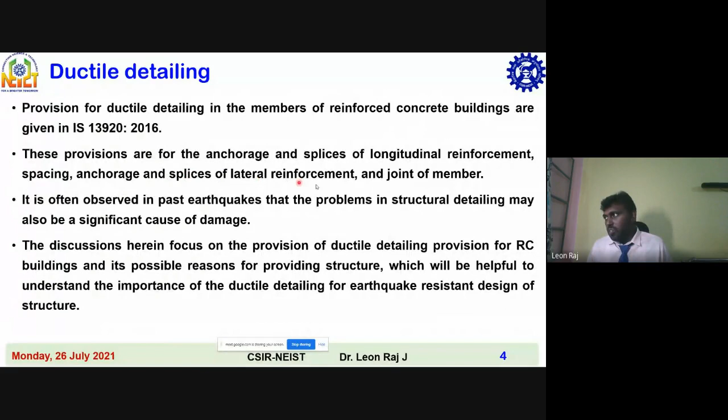Introduction to ductile detailing provisions. The ductile detailing provision is given in IS 13920 for members of reinforced concrete buildings such as beams, columns, and shear walls, members subjected to earthquake and gravity loading. These provisions cover anchorage and splices of longitudinal reinforcement, spacing, anchorage and splices of lateral reinforcement, and joints of the member. It is often observed in past earthquakes that problems in structural detailing may also be a significant cause of damage.

The discussions here focus on the provision of ductile detailing for RC buildings and its possible reasons, which will be helpful to understand the importance of ductile detailing in earthquake resistant design of structures.

General specification: the design and construction of reinforced concrete buildings shall be governed by the provisions of IS 456/2000, except as modified by the provisions in this code. So we will always follow IS 456/2000, with some additional modifications given in IS 13920 to ensure ductile failure in buildings. To ensure ductile failure in buildings, we have to ensure ductile failure at the member level itself, and that is assured by materials also.

Therefore, the minimum grade of concrete is fixed by IS 13920 for buildings and other structures. For buildings, M25 is the minimum grade of concrete for buildings more than 15 meters in height in seismic zones 3, 4, and 5, and not less than that required by IS 456 based on exposure conditions. There are several types of exposure conditions: moderate, severe, very severe. So based on the exposure conditions, we also have to consider the minimum grade of concrete for the buildings.

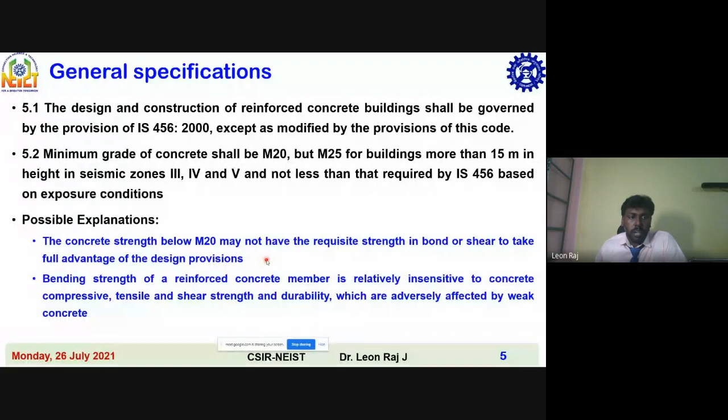Possible explanations: the concrete strength below M20 may not have the requisite strength in bond or shear to take full advantage of the design provisions. The bending strength of the reinforced concrete member is relatively insensitive to concrete compressive, tensile, and shear strength and durability, which are adversely affected by the weak concrete, and material characteristics and irregularities.

So there are four stages, right? There are different terminologies: characteristic strength, concrete acceptance criteria, target mean strength. For example, if you have an M20 grade of concrete, your target mean strength is 26 MPa, that is FCK plus 1.65 into established standard deviation of 4 MPa.

So therefore your target strength is 26 MPa. But in the field, it is not possible to achieve the target mean strength. So what is the code specified acceptance criteria? Actually, this table gives the acceptance criteria of concrete, based on Table 11.

For M15 and above, the acceptance criteria is FCK plus 0.825 into established standard deviation. For 20 MPa concrete, your acceptance criteria is 23.5 MPa, or FCK plus 3. We can take that as FCK plus 3, that is 23 MPa; FCK plus 0.825 into standard deviation 4 will be around 23.5 MPa. So you will get 23.5 MPa as the acceptance criteria.

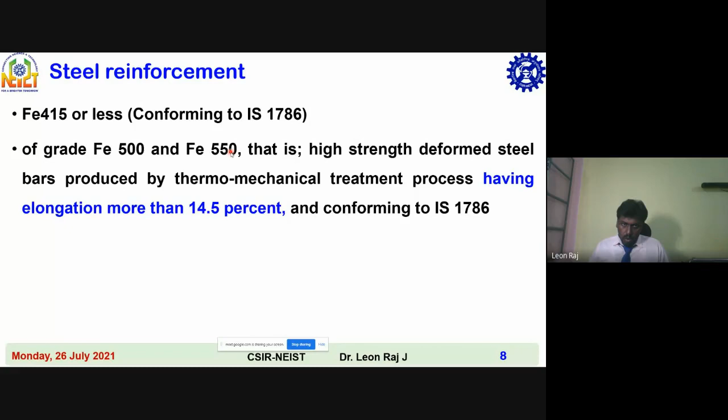So proof stress - I want to give more clear information about the proof stress. The proof stress is measured by drawing a line parallel to the elastic portion at a specified strain. So this is the specified strain.

This strain being a percentage of original gauge length, hence it is 0.2% proof and 1% proof. These are all there. So I want to give an example.

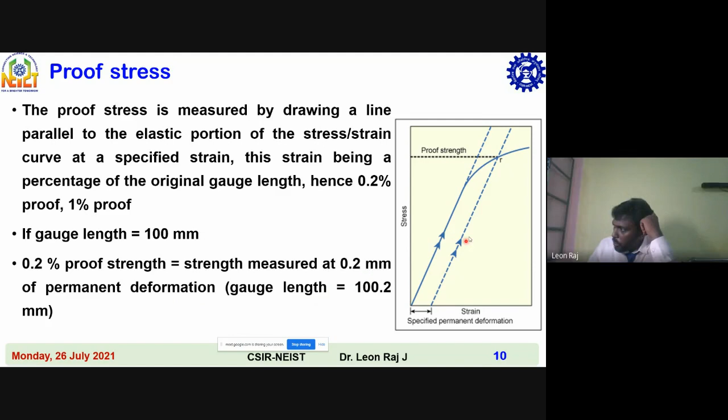If gauge length is 100 mm, so if you are testing a specimen and our gauge length is 100 mm, then 0.2% of proof strength is equal to strength measured at 0.2 mm of permanent deformation. Your gauge length at that point shall be 100.2 mm. So that point is exactly what you get. From this point, if you draw this same slope, you will get this proof strength.

Then the ratio of actual ultimate strength by 0.2% of proof strength is equal to 1.125.

In RC frame buildings, lintel beams are not to be integrated into the columns to avoid the short column effect. So when you are doing analysis, you should not consider these lintel beams. If you are considering them, that has to be incorporated in the structural analysis. When integrated, they shall be included in the analytical model for structural analysis.

Plinth beams and staircase beams and slabs framing into columns shall be included in the analytical model for structural analysis. So this is the plinth beam and this is the column. When you consider this plinth beam for analysis, to avoid the short column effect, you have to consider the same plinth beam in the structural analysis model also.

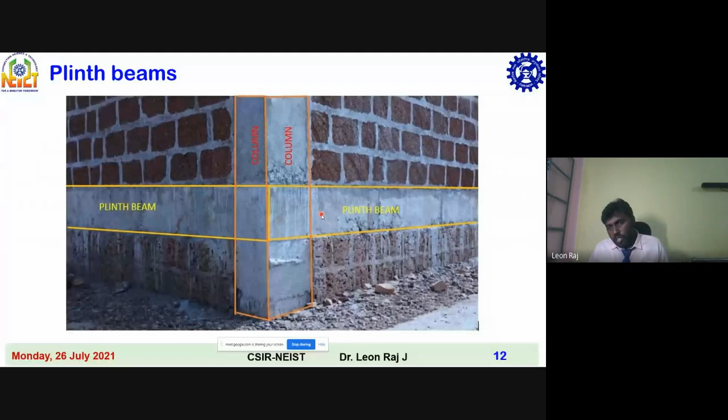Then general specifications: RC regular moment resisting frame buildings shall have planar oriented along the two principal plan directions of buildings. Irregularities listed in IS 1893 shall be avoided. What are all the irregularities? Mass irregularity, stiffness irregularity, vertical discontinuity irregularity, and many more irregularities that we are going to see in the next slides. Buildings with any of the listed irregularities perform poorly during earthquake shaking.

In addition, buildings with floating columns - what is meant by floating column? Usually a column starts from the foundation, right? A floating column starts from the beams. So beneath the floating column, you have to construct a deep beam. So setback columns or these floating columns perform poorly during earthquakes.

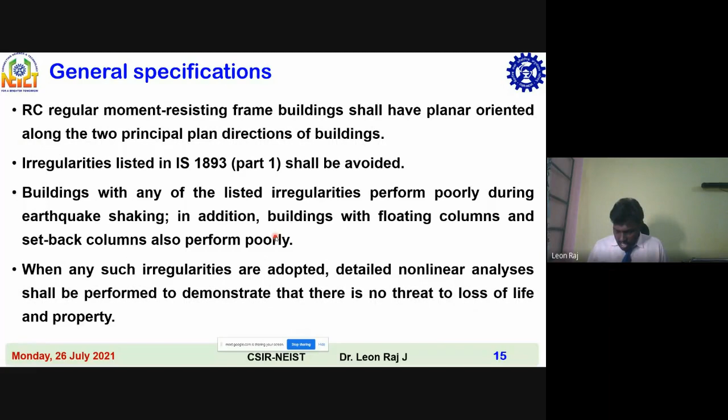Then seismic zoning maps. The BIS sectional committee has appreciated that there cannot be an entirely scientific basis for zoning in view of the scanty, poor data available. So there are different zones classified as 1, 2, 3, 4, and 5.

Most of the northeast states belong to zone 5, and Tamil Nadu belongs to zone 2 or 3 - mostly zone 2. Gujarat and the places near the Western Ghats come under zone 3 and 4. Maximum intensity at different places can be fixed on a scale only on the basis of observations made and recorded after the earthquake.

Thus a zoning map based on the maximum intensities arrived likely leads in some cases to incorrect solutions, in view of incorrectness in the assessment of intensities. Still, a lot of research is going on in measuring the intensities of earthquakes, human error in judgment during damage surveys, and variations in quality and design of structures causing variation in type and extent of damage to structures with the same intensity.

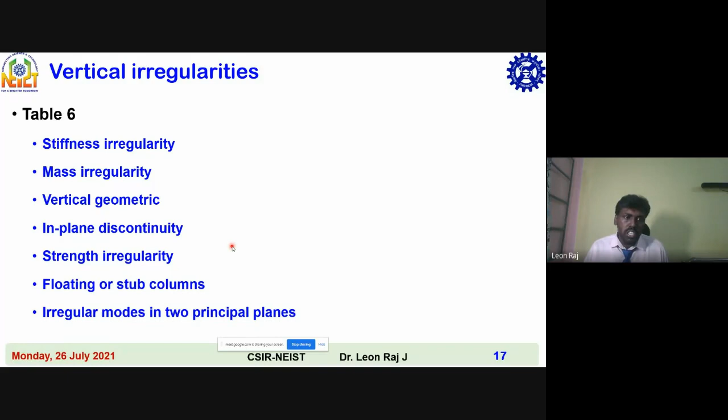There are different types of irregularity: stiffness irregularity, mass irregularity, vertical geometric irregularity, in-plane discontinuity, strength irregularity, floating or stub columns, and irregular modes in two principal planes.

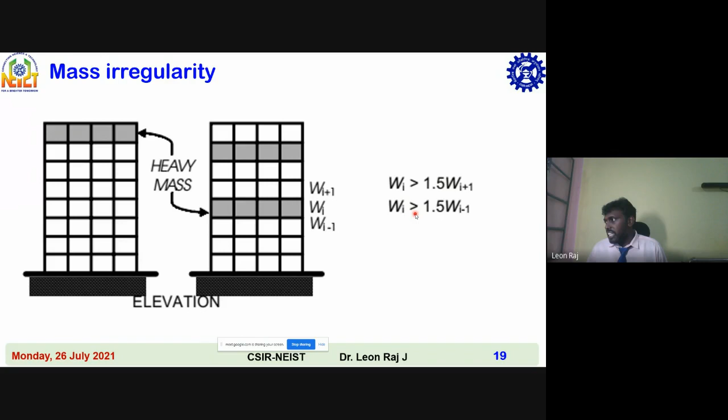If the stiffness of the lower story is Ki, the first story is Ki plus 1, second story is Ki plus 2, and if Ki plus 1 is greater than Ki plus 2, or Ki plus 1 is greater than Ki, then it is called stiffness irregularity. For mass irregularity, if Wi is greater than 1.5 times Wi plus 1, or Wi is greater than 1.5 times Wi minus 1, then it is called mass irregularity.

For vertical geometric irregularities, if the base length of the building is L, and the irregular portion is A, then A greater than 0.25 L indicates irregularity. If irregularities exist on both left and right sides, A should be greater than 0.125 times the base of the building.

Here you can find different types of irregular buildings. This kind of building is available in Chennai also. Whenever you go towards Tambaram, you can find an IT building that looks like this. Here the irregularity A should be greater than 0.1 times of L.

If the top portion is L1 and the bottom portion is L2, and L2 is greater than 1.25 times L1, then this is vertical geometric irregularity, expressed as L1 by L, with L1 and L2 as shown.

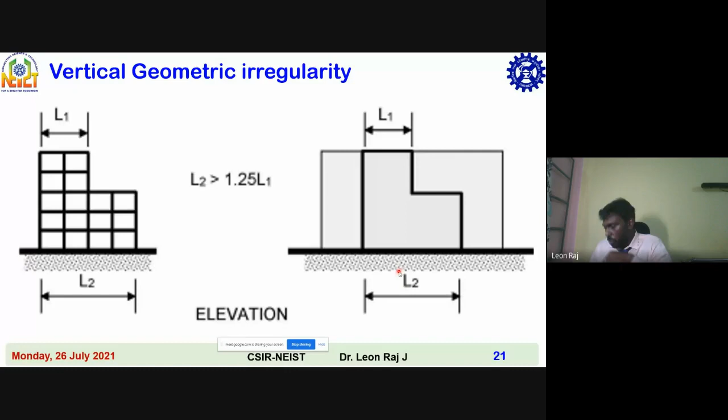In-plane discontinuity in vertical elements occurs in shear walls. This often happens when you need a parking space, or when the first floor starts from a certain end, causing vertical discontinuity in the shear wall. When LW, L0 is greater than 0.2 LW, that is in-plane discontinuity.

For strength irregularity, the lower story is SI, first floor is SI plus 1, second story is SI plus 2. If SI plus 1 is less than SI plus 2, and SI is less than SI plus 1, then this type of irregularity is known as strength irregularity.

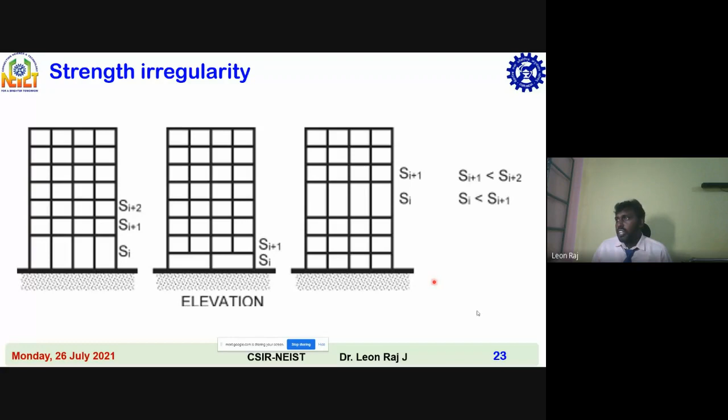Then detailing of beams and columns.

The requirements of this section shall apply to beams resisting earthquake induced effects in which the factored axial compressive stress does not exceed 0.08 FCK.

If your FCK is 20, 30, 50, 60, 80 MPa, that is M20, M30, M50, M60, M80, your factored axial compressive stress limit shall be 1.6 MPa, 2.4 MPa, 4 MPa, 4.8 MPa, 6.4 MPa respectively.

When it is less than this factored axial compressive stress, you can classify it as a beam. Beams in which the factored axial compressive stress exceeds 0.08 FCK shall be designed as columns, inclined members, or strut members.

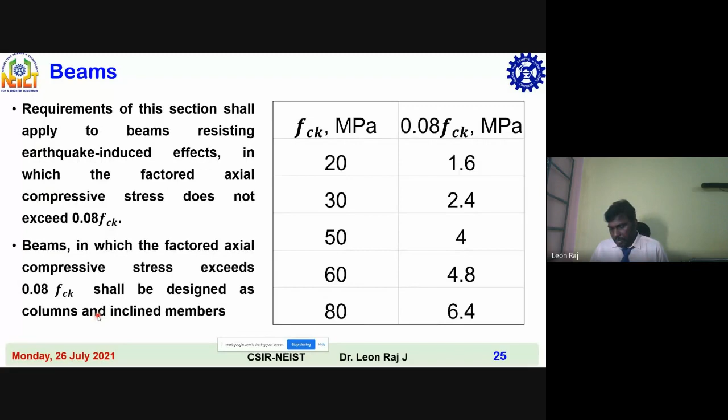The code specifies minimum requirements. If a practicing engineer is asked to check a design, the first thing you have to verify is certain criteria specified by the code.

According to IS 13920, the width to depth ratio of beams matters, with minimum width and maximum depth specified. The width to depth ratio should be greater than or equal to 0.3. So for a beam with depth D, width equals 0.3 times depth. If your width is 150 mm, your maximum depth is 500 mm.

To avoid slenderness, the code has specified this criteria: width 200 mm means maximum depth 665 mm, 250 mm means 833 mm, 300 mm means 1000 mm, approximately 3 times the width. 350 mm means 1167 mm, 400 mm means 1333 mm, 450 mm means 1500 mm, and width 500 mm means 1667 mm.

This is the maximum depth, so your selected width and depth should be within the limit. The minimum width is 200 mm, so the first line criterion is struck out. Whatever beams you provide should have a minimum width of 200 mm and maximum depth of 0.25 times clear span.

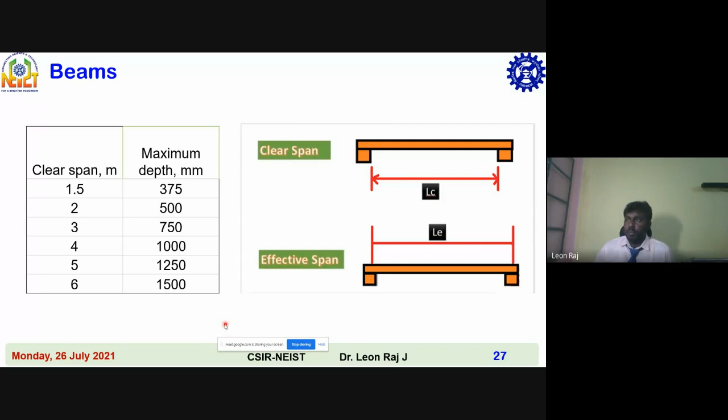So what is the maximum width of the beam? This figure may look confusing, but I want to decode this figure.

So here you can see the columns here. This is the column, and this column is tied with lateral ties. This is the lateral ties, and this is the closed tie. This is one closed tie, and this is also another closed tie.

So width of the lateral dimensions, C1 and C2, were the width of the lateral dimensions. Here you can see the transverse reinforcement. These are all transverse reinforcement through the column to confine the beam, with longitudinal reinforcement passing

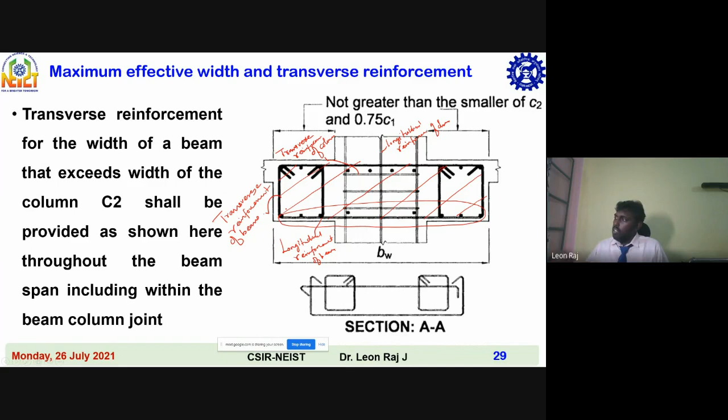So here you can see this is the longitudinal direction of the column, and this is the transverse direction of the column. And here this is the longitudinal direction of the beam, and this is the transverse direction of the beam.

Longitudinal reinforcement: the beam shall have at least two 12 mm diameter bars each at the top and bottom faces. The minimum steel reinforcement shall be 0.24 times square root of FCK divided by Fy.

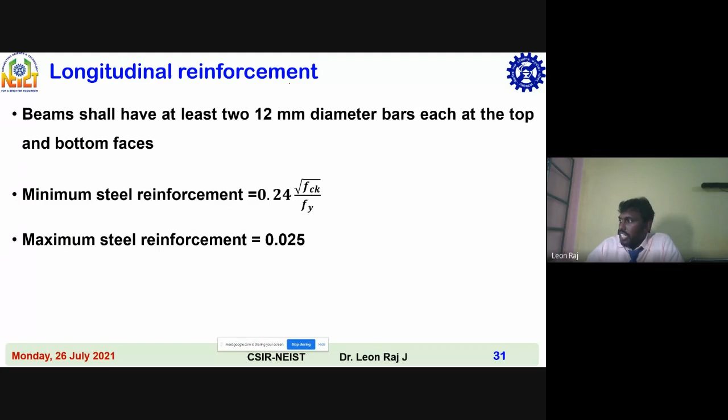So you know the grade. FCK is the grade of concrete. Fy is the yield strength of the steel reinforcement, that is grade of steel. The maximum steel reinforcement shall be 0.025.

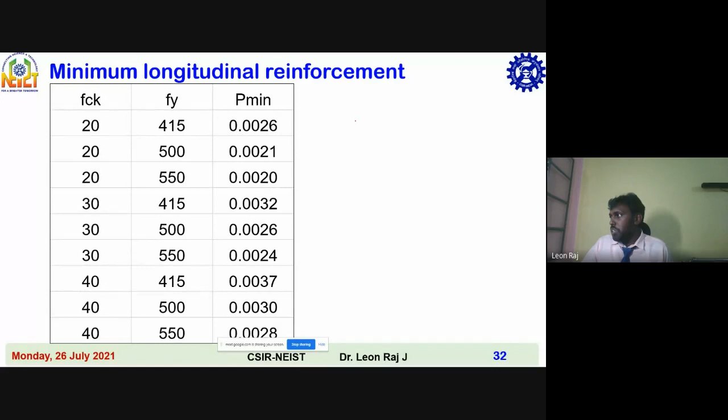How to calculate this percentage, I'm showing in the next slide. So if your grade of concrete is 20 and your Fy is varying between 415, 500 and 550 MPa, what is the minimum longitudinal reinforcement? If this is your beam, the reinforcement provided at the bottom is known as longitudinal reinforcement, and the minimum percentage of reinforcement increases accordingly.

So you can see the minimum percentage of reinforcement, that is P minimum, versus Fy. For Fy of 415, 500, and 550, the values are 0.0026, 0.0021, 0.0020 respectively. Here you can see it is decreasing. So these three values, if you notice, and here also these three values, it is decreasing.

So when the grade of concrete increases - this is M20, this is M30, and this is M40 - and the grade of steel is fixed, your minimum tension reinforcement increases. When the grade of concrete increases, your minimum tension reinforcement increases from 0.0026 to 0.0037. When the grade of steel increases, your minimum tension reinforcement requirement decreases. That's what I want to say with this statement.

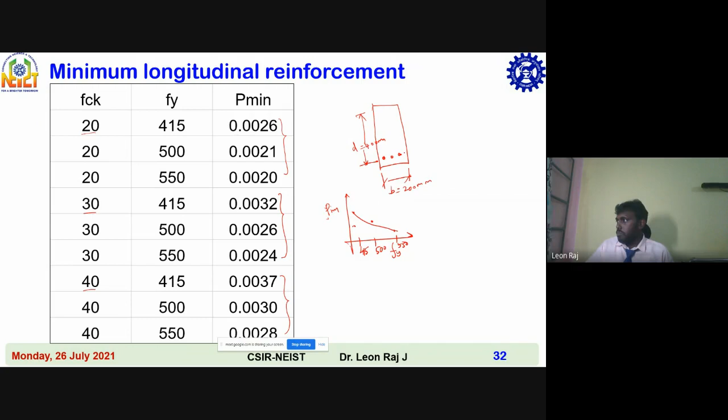Then if your breadth is 200 mm and your depth is 400 mm, provided with 4 bars of 12 mm diameter.

Your AST, your percentage of tension reinforcement, that is rho m - rho means reinforcement percentage, m means main reinforcement. So rho m is equal to AST, area of steel reinforcement in tension zone, divided by B into D, where T means tension zone, B is breadth and D is depth. Your AST is equal to pi by 4 into D square, which is equal to 452 mm square. The unit is mm square, and this is mm and mm, so it will be cancelled. And your percentage of reinforcement is...

0.0056. Sometimes it is mentioned in percentage also, that is 100 into AST divided by BD, but here we are mentioning it in terms of ratio only. Your maximum tension reinforcement ratio as per IS code is 0.025, and your minimum is 0.0026. So whether your provided reinforcement is within the limits or not, that you have to check. This is what you have to do every time for all the beams.

Then, longitudinal reinforcement of beams. Longitudinal steel on the bottom face of a beam framing into a column shall be at least half of the steel on its top face at the same section. So this is your column, and this is your beam.

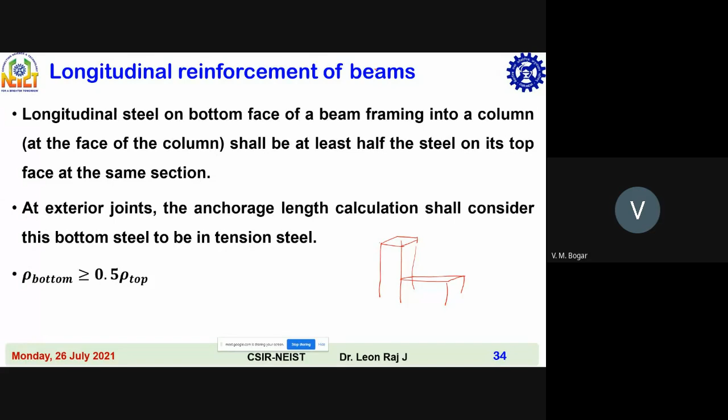The longitudinal steel on top - and the longitudinal steel on the bottom face of the beam. Here is the bottom face. So this is the bottom face. The longitudinal reinforcement provided at the bottom face of a beam framing into a column - so this is the place framing into the column - shall be at least half the steel of its top face, that is 50% of the top reinforcement at the same section. So the bottom reinforcement should be at least 50% of the top reinforcement. That's what this line is explaining.

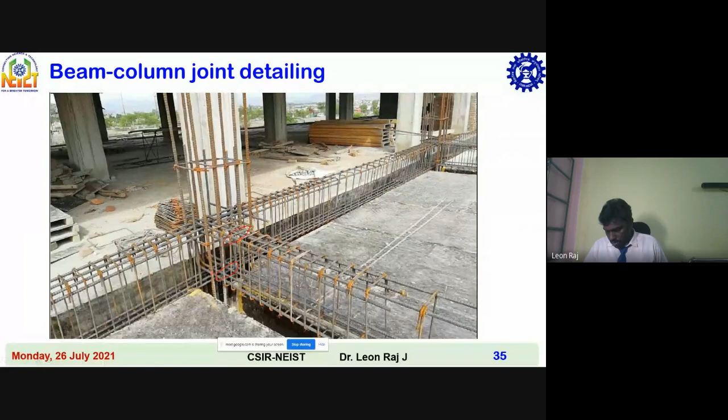At exterior joints, the anchorage length calculation shall consider this bottom steel reinforcement - that is rho bottom shall be a minimum of 0.5, that is 50% of top reinforcement. Here you can see these are the longitudinal reinforcements of columns, and this is the longitudinal reinforcement of beams. So the code is telling that the reinforcement framing into the column shall be at least 50% of the top reinforcement. So first you have to calculate the reinforcement percentage at the top and at the bottom, and check whether it is above the criteria or not, to ensure ductile behavior.

Then, longitudinal reinforcement of beams. The longitudinal steel in beams at any section, at top or bottom face - so this is the top face or this is the bottom face - shall be at least 0.25 times the longitudinal steel provided at the top face of the beam at the face of the column. When the top longitudinal steel in the beams at the two supporting column faces is different, the larger of the two shall be considered.

Once again, longitudinal steel in beams at any section, on top or bottom face, at least 0.25 times longitudinal steel should be provided at the top face of the beam at the face of the column. So what is the reinforcement provided here as longitudinal reinforcement? That should be 0.25 times at any section. It should be more than this rho m.

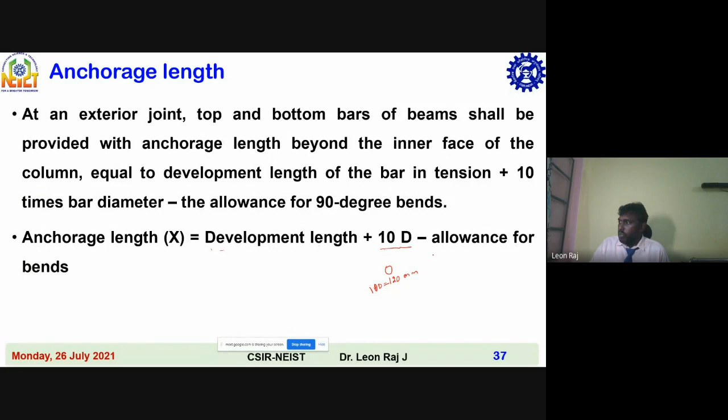Then anchorage length at an exterior joint: top and bottom bars of the beam shall be provided with anchorage length beyond the inner face of the column equal to development length. This is the development length plus 10d, 10 times the diameter of the bar. If the diameter of the bar is 12 mm, then your 10d is equal to 120 mm, then minus allowance of bends. What is allowance of bends? We will see in the next slide.

Then tau BD is the design bond stress given in 26.2.1.1. Note that development length includes anchorage values of hooks in tension reinforcement, and for bars of sections other than circular, the development length should be sufficient to develop the stress in the bar by bond. As per design provision, the stress at this point is 0, but in real case the stress at this point is not equal to 0. That's why we are providing this anchorage length. Here you can see this is x, this complete length is known as x, that is equal to development length plus 10d minus the allowance for this bend. This has to be provided as per IS 456/2000.

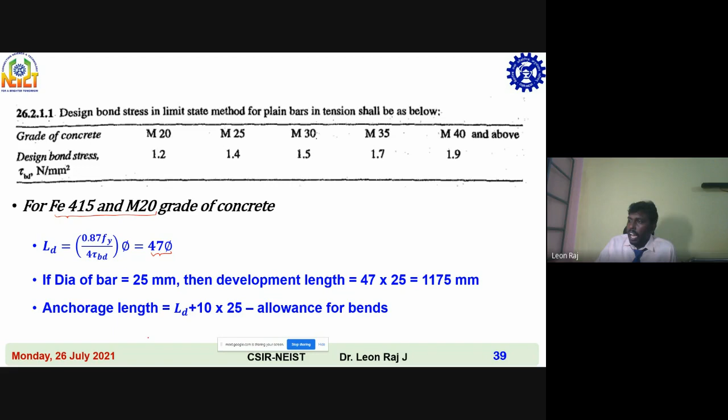Anchorage length is equal to LD plus 10 into 25 minus allowance of bends. So this number, that is 47, can be taken from these tables. This table is taken from Professor Menon's Design of Concrete Structures book.

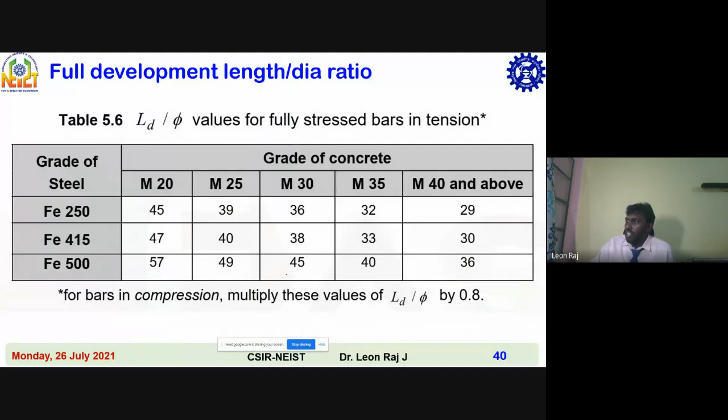LD by phi values are for fully stressed bars in tension. For FE 415 and M20 grade of concrete it is 47. For M25 it is 40. For M30 it is 38, 33. So you can see it is decreasing with respect to the grade of concrete, while at the same time it is increasing with respect to the grade of steel. So LD, that is development length by phi, for bars in tension. If it is in compression, you have to multiply this whole number by 0.8.

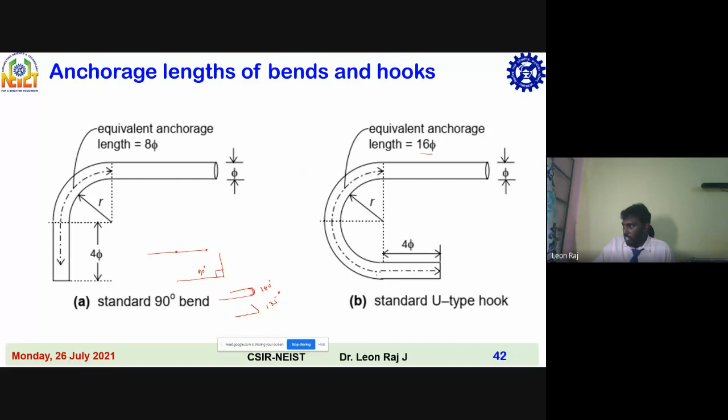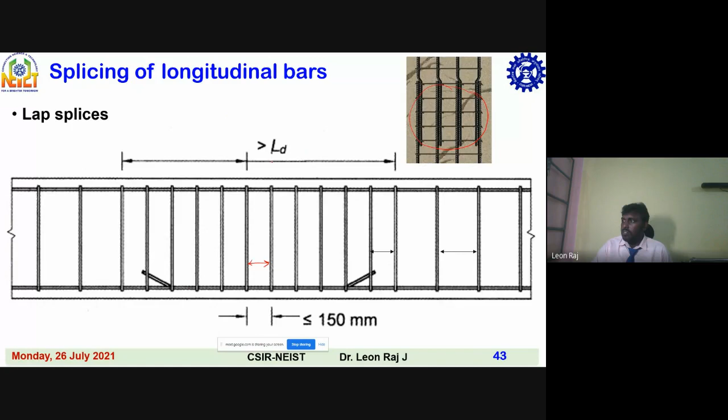Lap splices shall not be provided within a joint, that means beam column joint or any other joint, within a distance of 2D from the face of the column, where likely shear failure may occur, within a quarter length of the beam adjoining the location where flexural yielding may occur under earthquake effects. Not more than 50% of area of steel bars on either top or bottom face shall be spliced at one section. The explanation for this is given in the next slide.

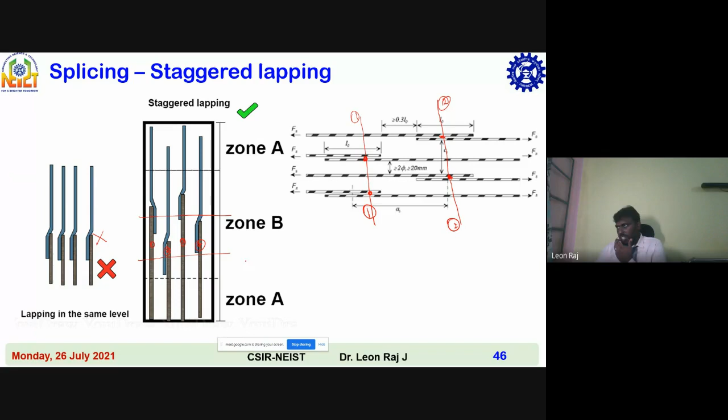This is the line of action. Here also you can see, take any section here, only 2. This is section 1, and this is section 2. Here only 2 splicings, 50% of bars were spliced, and here also only 50% of bars were spliced. So this is called staggered lapping.

Then mechanical couplers. Mechanical couplers conforming to IS 16172 shall be used when the longitudinal steel bars have to be continued for beam spans larger than manufacture lengths.

The splicing shall be within 2D. What is the reason for 2D? I will explain in the coming slides. The splicing within 2D from the member face is likely where the yielding of reinforcement takes place.

This is a simply supported beam. Here the tension reinforcement shall be provided. Likely yielding will happen at the midspan, where the shear failure is likely to happen near the support. So that's what the code is telling at these places. This is 2D, here is likely yielding to take place, and here is 2D. So splicing within these places is not accepted.

Then easy flow of concrete should be ensured. Here you can see some additional diameter, the bar diameter may be 12, 16 or 20 mm, whatever it may be. Here the diameter is increasing because of these mechanical couplers.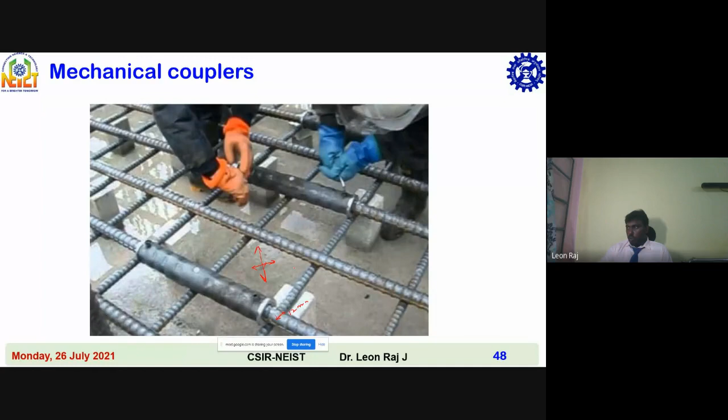So this is the welded splice. How it looks - at anywhere the line of action should not be missed. Here you can see, draw a straight line - this shows the line of action is maintained.

That's why this bend is provided. This bend, minimum 1/6 slope, is adopted to maintain the line of action.

Most of the time, what they will do is make a mistake - they will do the welding just like this, so the line of action misses. So this is a wrong detailing.

Then welded splicing. Welded splices shall not be used in beams for a distance equal to 2 times the depth, whether it is welded, couplers, or lap splicing, shall not be used in beams for a distance of 2D, 2 times the depth of the member from the member face, or in any location where yielding of reinforcement is likely to take place.

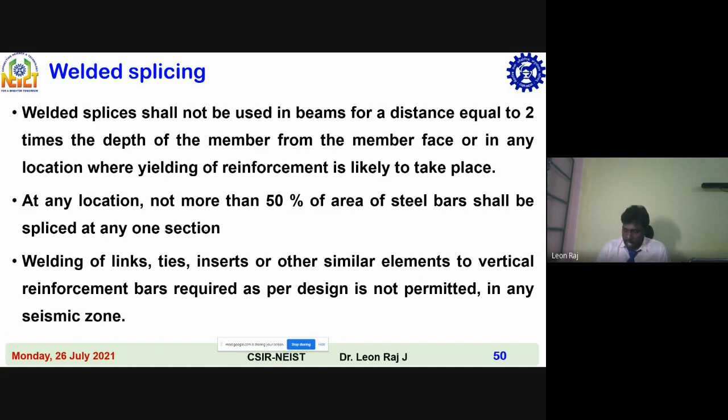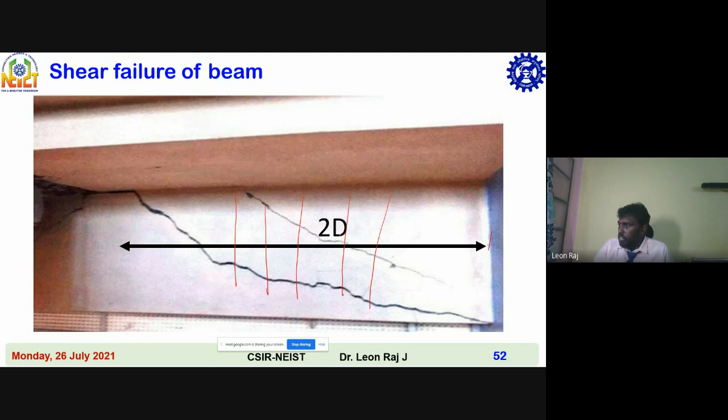So this is the column face, this is the column face. When the column face is at 2D, your splicing shall be avoided.

Then transverse reinforcement. In normal practice, a link is made up of a single bent bar - meaning one long bar we will take and bend like this. So this is a single bend bar, but it may be made of 2 bars also, like a U-link with a 135-degree hook, as I explained earlier, this is your 135-degree hook.

135 degrees. This is a 90-degree bend, and this is a 180-degree bend.

This is a 180-degree bend, so a 135-degree hook with an extension of 6D at each end embedded in the concrete core, not less than 65 mm. So minimum you have to provide 65 mm from this point. If this is your hook, from this point onwards, minimum 65 mm you have to provide. Hence the reinforcement will go deep into the concrete core, whether it is a beam or column, it will go into the core.

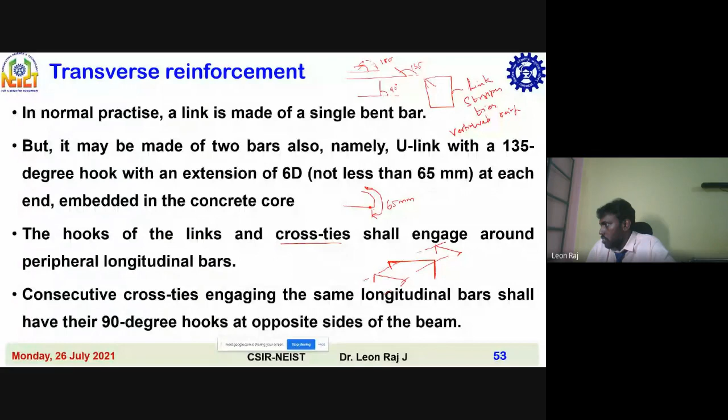So if this is your beam, you have to provide these cross ties on opposite directions. For another one, this cross tie has to be provided here like this. So here you can see the first cross tie - there is no cross tie here, actually the stirrups themselves are provided in opposite directions. If you are providing any cross tie, the first one should have the open section come like this, and the second one will be provided like this.

So you can see the difference, right? For the first one, the hooks come at this point, and for the second one the hooks come on the other side, and for the third one the hooks come here, for the fourth one hooks come here, and the fifth one - so alternatively it varies. These things have to be checked clearly.

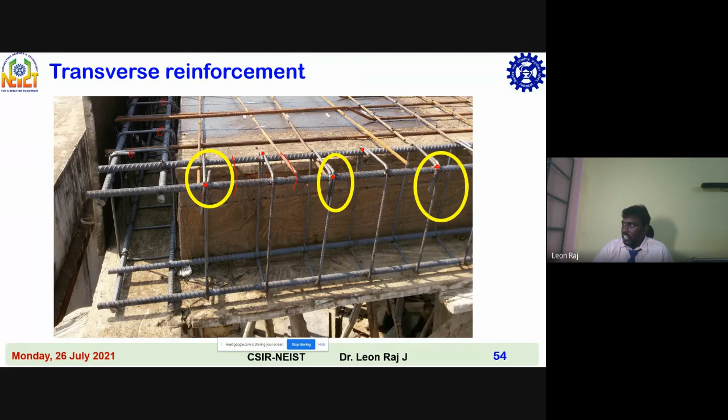So this is the cross tie. The first cross tie will look like this, and the second one you have to give like this. The third one again same repetition - so it goes like that.

So transverse reinforcement means, as I told earlier, it can be named stirrups, links, or vertical web reinforcement, whatever it may be. Only vertical links shall be used in beams - inclined links shall not be used.

When the longitudinal reinforcement bars are secured by cross ties in beams that have slabs on one side, 90-degree hooks shall be placed on that side. This is the 90-degree hook - there are two hooks in cross ties. One is a 90-degree hook, and another is a 135-degree hook.

In some places you will encounter slabs and columns, or slabs and beams like this. In those cases, if there is a need for providing cross ties, the cross ties shall be placed on that side, with the 90-degree hooks placed on that side. This is how to place it.

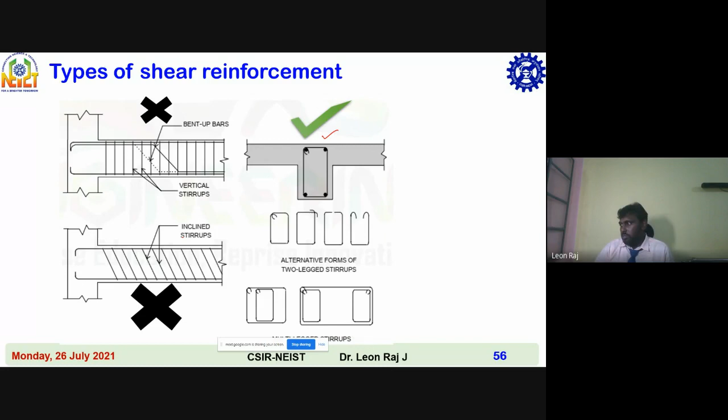Then, shear force of beams under plastic hinges - if there is formation of a plastic hinge at the supports, what we have to consider is how to enhance the shear force. The minimum diameter of the stirrups or link shall be 8 mm.

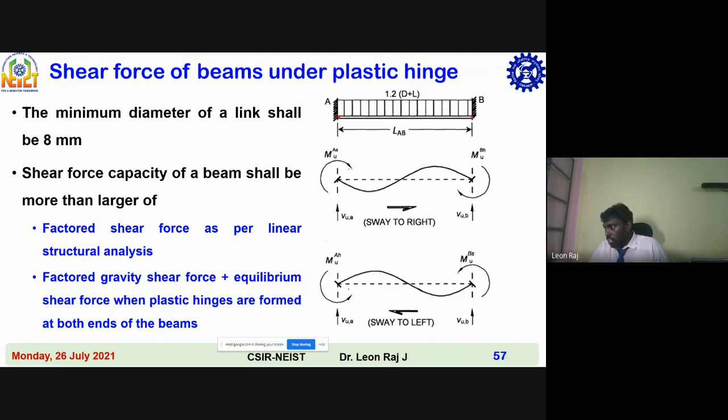Shear force capacity of the beam shall be more than the larger of: factored shear force as per linear structural analysis, and factored gravity shear force plus equilibrium shear force when plastic hinges are formed at both ends of the beam. Here you can see the moment at point A and moment at point B, then sway right and sway left. For sway right, the shear force shall be the shear force induced by dead load and live load, plus the shear force induced by sway - that is plus 1.4 and minus 1.4 times the moment at point A and B, divided by the length of the member LAB.

For sway left, it's the same thing reversed - minus plus for A and B, for sway right and left. The shear force is calculated, and accordingly you have to provide the shear reinforcement. So the code gives a slight modification for the calculation of shear force, and for this shear force you have to provide the reinforcement.

In the calculation of design shear force capacity of RC beams, contributions of the following shall not be considered: bent up bars, inclined links, and concrete in the RC section. Also, close spacing of links over the length of 2D at either end of the beam shall not exceed D by 4, 8D, or 100 mm.

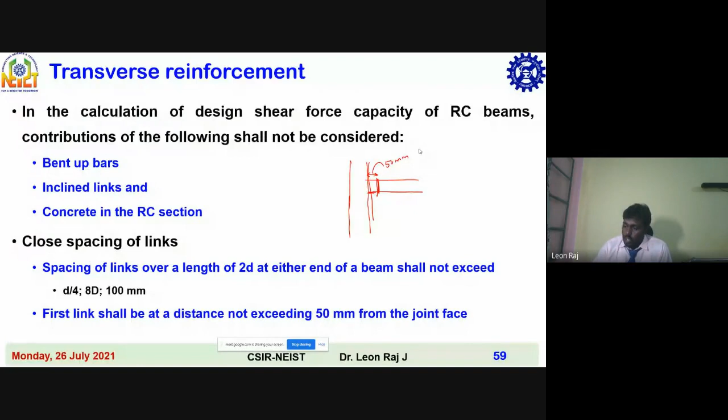The spacing is given as D by 4, 8D, or 100 mm. The closely spaced link shall be provided over a length equal to 2D on either side of the section where flexural yielding may occur under earthquake effects. Over the remaining length of the beam, vertical links shall be provided at a spacing not exceeding D by 2.

A complete beam detailing is given in this figure, reproduced from IS 13920:2016. Here you can see the first stirrup should be provided within a spacing of 50 mm, and within a distance of 2D you should not provide any splicing, either from this face or that face - these are column faces.

On this column face, 2D, you should not provide any splicing. Hoop spacing should not be more than d by 2, and hoop spacing is d by 4, 8dB, or 100 mm. So here you can find very close spacing, maybe 100 mm, but here you can find a little wider spacing, that is 150 mm.

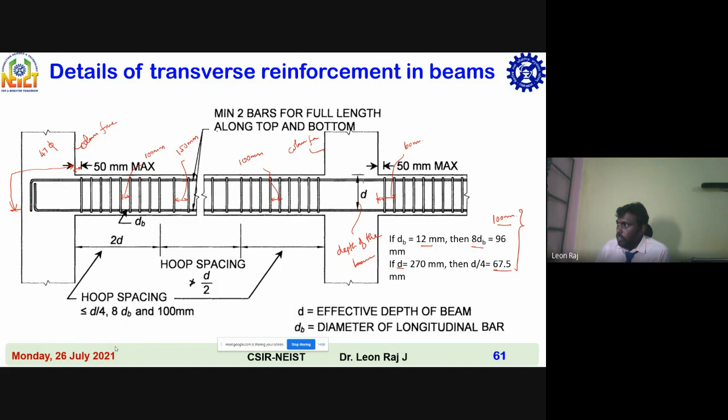For columns and inclined members resisting earthquake-induced effects, where the factored axial compressive stress due to gravity and earthquake effect exceeds 0.08 FCK, the factored axial compressive stress limit including all load combinations of earthquake effects shall be 0.4 FCK. T and X-shaped columns need special detailing per the latest literature. The minimum dimension of a column shall not be less than 20 times the diameter of the bar.

In IS 13920, there is a confusion in this section. In the running text, they have given 20dB, but in the picture, they have given 15dB. So to be conservative, you can take 20dB.

dB is the diameter of the largest diameter longitudinal reinforcement bar in the beam passing through or anchoring into the column at the joint. If dB equal to 25 mm, then 20 dB is equal to 500 mm, your minimum column based on the longitudinal reinforcement.

So if this is your column, your column width is defined based on the longitudinal reinforcement of the beam. So this is the longitudinal reinforcement of the beam, that is dB. Based on this dB, your minimum column width is decided. So if your dB is equal to 25 mm, then 20 dB is equal to 500 mm. So this is 500 mm.

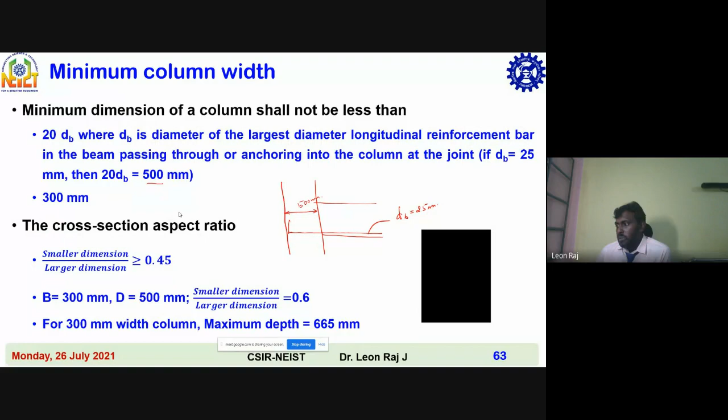Smaller dimension by larger dimension must be greater than or equal to 0.45. For example, if B is equal to 300 mm and D equal to 500 mm, smaller dimension by larger dimension is equal to 0.6. So for 300 mm width column, maximum depth shall be 665 mm.

So minimum size of the RC columns based on the diameter of bars in beam, this is the point I mentioned here. In the running text, they have mentioned it is 20 dB, and here they mentioned it is 15 dB. So this is a minimum column width, this is the column width, and the minimum column width is given here based on the reinforcement, meaning either passing it or entering into the column.

Relative strengths of beam and columns at a joint, that is strong column, weak beam concept. How do they ensure a strong column and weak beam concept, that we are going to see in the upcoming slides.

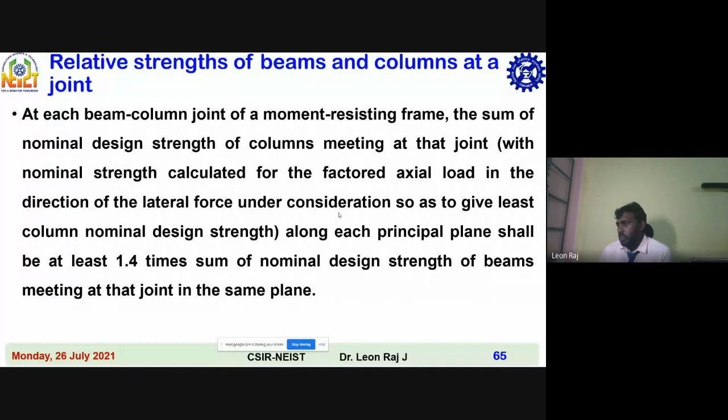At each beam column joint of a moment resisting frame, the sum of nominal design strength of columns meeting at that joint with the nominal strength calculated for the factored axial load in the direction of the lateral force under consideration, so as to give least column nominal design strength along each principal plane, shall be at least 1.4 times sum of nominal design strength of beams meeting at that joint in the same plane. So here you can see there are four moments, right?

This is column, this is beam. So the moment here, this is a cut section, right? So it's a continuation, so here also moments will come. So this is coming in this direction, or it will be going here. So this is the cut section here.

So this is your MCT, that is moment of the column in top section, and moment of the column in bottom section, MCT, MCB. So moment measured at beam, that is moment of resistance of beam on the right side, moment of resistance of the beam at the left side. This sum of moments of the columns, MCT plus MCB, that should be higher than 1.4 times MBR plus MBL.

So here you can understand, right? So your column strength is 40% higher than the beam strength. So that's why strong column, weak beam. So first moment or hinges or failure should occur in the beam, then followed by columns. So that's what this strong column, weak beam concept is introduced.

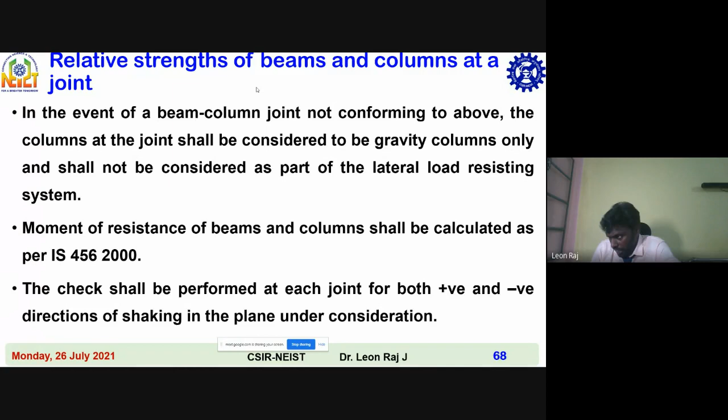So in the event of a beam column joint not conforming to the above, the columns at the joint shall be considered to be gravity columns and shall not be considered as part of the lateral load resisting system. Moment of resistance of beams and columns shall be calculated as per IS 456. There is no special provision given to establish the moment of resistance in this IS 13920. The check shall be performed at each joint for both positive and negative directions of shaking in the planes.

Relative strength of beams and columns at a joint. Design moments of resistance of beams meeting at the joint shall be considered in the same direction, and similarly the same moments of resistance of columns at the same joint shall be considered to be in the direction opposite to that of the moments in the beams. The check shall be waived for all the joints at roof level only.

In buildings more than four stories tall, the strong column, weak beam concept will not be applicable for flat slab structures, because the concept there is slab-column connection. There is no beam-column connection.

Then, column longitudinal reinforcement: circular columns shall have a minimum of 6 bars. Splicing of longitudinal bars, as like beams, the concept remains the same.

Lap splices, when adopted, closed links shall be provided over the entire length of the column where longitudinal bars are spliced. The spacing of these links, that is horizontal ties, shall not exceed 100 mm.

Then lap length shall not be less than the development length of the largest longitudinal reinforcement bar in tension. Lap splices shall be provided only in the central half of the clear column height, and not within the joint within a distance of 2D from the face of the beam.

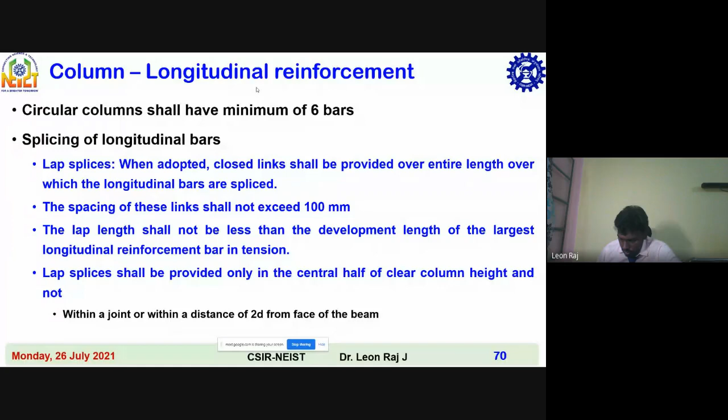The condition for splicing is common for beams and columns. Not more than 50% of area of steel shall be spliced at one section. Lap splices shall not be used for bars of diameter larger than 32 mm.

So when you use bars of diameter size more than 32 mm, you have to go for mechanical splicing or welded splicing.

Mechanical coupler splicing shall conform to the standard IS 16172 and be capable of developing the specified tensile strength of the spliced bar. It shall be permitted within a distance equal to or 2 times the depth of the member from the column face, in any location where yielding of reinforcement is likely to take place.

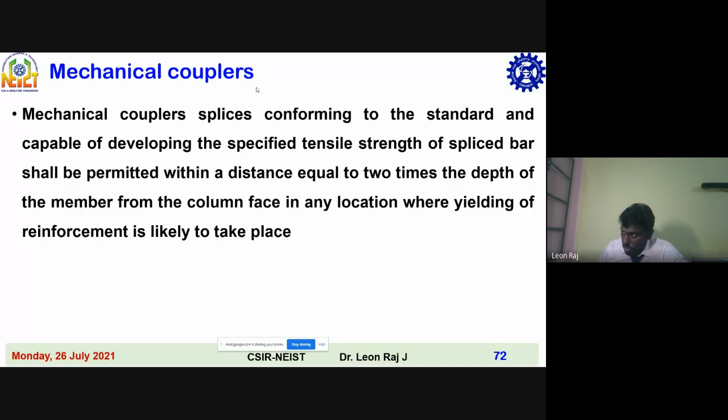And welded splices also follow the same condition. So earlier we have seen lap splicing, mechanical couplers and welded splicing of beams. Now we are seeing lap splicing, mechanical couplers and welded splicing of columns.

Welded splices shall not be used in columns for a distance equal to 2 times the depth of the member from the member face, or in any location where yielding of reinforcement is likely to take place.

Whether it is column or beam, this point remains constant: at any location, not more than 50% of area of steel bar shall be spliced at any one location.

This is also common. But welding of links, ties, inserts, or other similar elements to vertical reinforcement bars as required per design is not permitted in any seismic zone. That is also common for all the splicing.

So here is one more point: the column that extends more than 100 mm beyond the confined core. So this is the core actually, this is the core region. From this point to this point, that is including stirrups, you call this the core concrete core column.

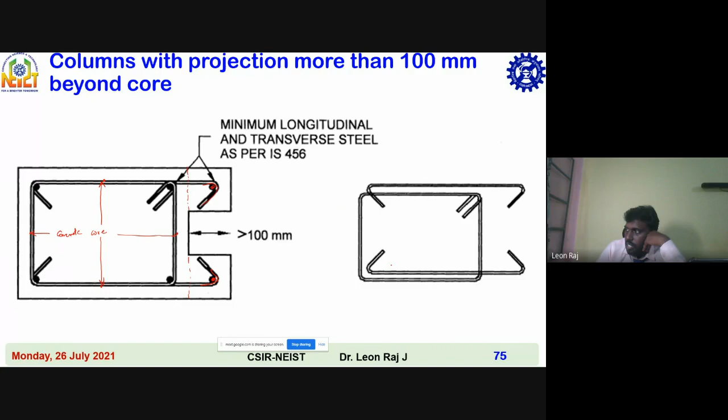For columns with concrete core less than or equal to 300 mm, you can provide ties like this. And for columns above 300 mm concrete core, you have to provide a cross tie like this.

So this is a cross tie. You can see on both sides 135-degree hooks, and here also you can see the stirrups are provided like this. So this is 1 and this is 2. Here you can see this is number 1 and this is number 2. Here only 1 and this is 1. This is the diameter of the bar.

Your minimum anchorage means to ensure that stirrups are anchored into the core, you have to provide 6d or a minimum of 65 mm. So how should this bar be inserted? This connection is detailed here.

The stirrups should come into this, and beyond this it should come. It should connect everything. You can see here the first bar, that is longitudinal bars are connected, stirrups are connected, and the cross tie is connecting the stirrups, that is the transverse reinforcement and the longitudinal reinforcement.

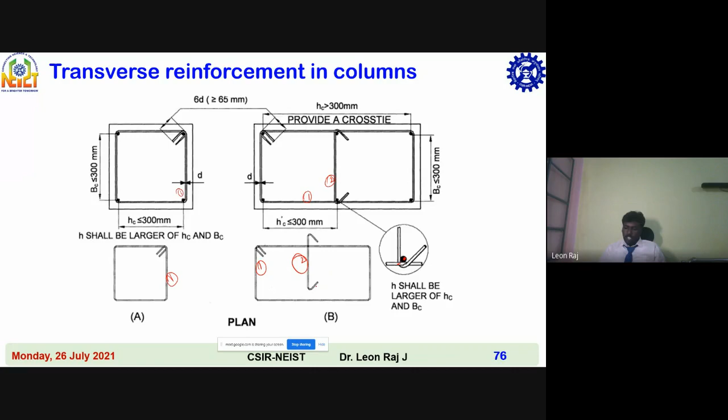And here on both sides you are providing the transverse reinforcement. So here you can see this is a stirrup, and these are cross ties that were given. One end is a 90-degree cross tie, and the other end has 135-degree hooks provided, and alternatively 135-degree hooks are provided, and the minimum dimensions are shown here.

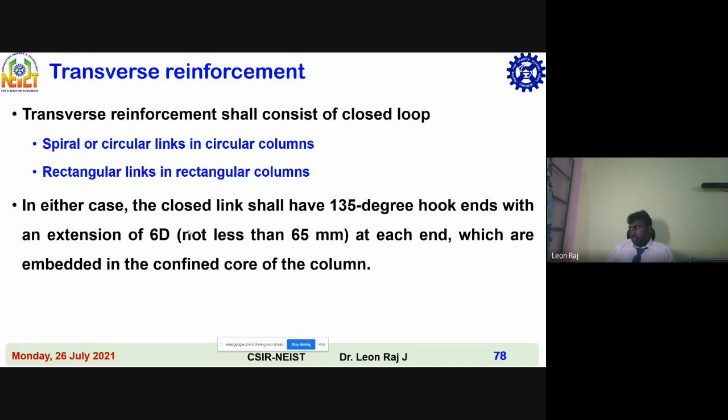The transverse reinforcement shall consist of closed loops, spiral or circular links in circular columns, rectangular links in rectangular columns. In either case, the closed link shall have 135-degree hook ends with an extension of 6D or not less than 65 mm at each end, which are embedded in the confined core of the column.

For rectangular links, the minimum diameter permitted of transverse reinforcement is 8 mm when diameter of longitudinal bars is less than or equal to 32 mm. So there are two conditions: less than 32 mm diameter bars, minimum transverse reinforcement is 8 mm; more than 32 mm diameter bars, minimum transverse reinforcement is 10 mm.

The maximum spacing of parallel legs of links shall be 300 mm center to center. Cross ties shall be provided if the length of any side of the link exceeds 300 mm. The cross tie shall be placed perpendicular to the link whose length exceeds 300 mm.

So you can see when the cross ties are provided, it's when the HC is exceeding 300 mm. So this is 300 mm, and this is exceeding 300 mm. So this is cross ties. Cross ties are provided when the stirrups exceed 300 mm.

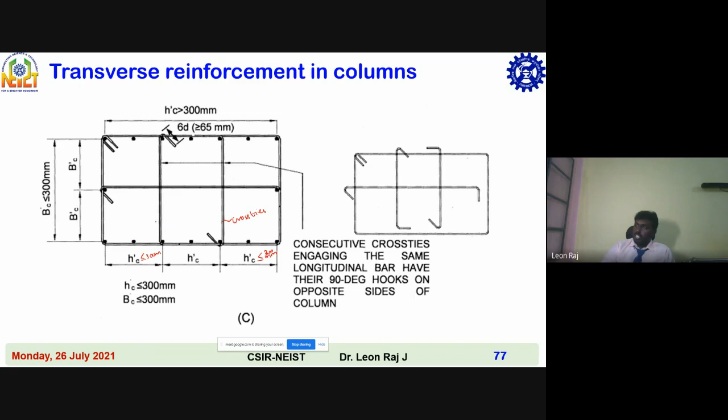Then, design shear force in columns. The design shear force demand on columns is the larger of the factored shear force demand as per linear structural analysis, and the factored equilibrium shear force demand when plastic hinges are formed at both ends of the beam. With moments at end A and B, MUA and MUB, for sway right and sway left, VU shear force shall be V equal to 1.4 times MUA plus MUB divided by HST.

The equilibrium design shear force of columns: the design moments of resistance of beam sections shall be calculated as per IS 456. The calculation of design shear force capacity of RC columns shall be calculated; both columns and beams shall be calculated as per IS 456.

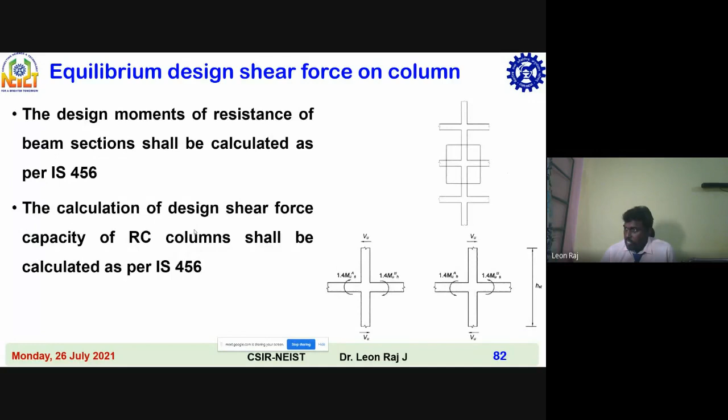And special confining reinforcement. Special confining reinforcement is provided when a larger amount of transverse reinforcement is required from the shear strength consideration. So special confining reinforcement means some additional reinforcement you are providing to ensure there is no likely shear failure, since flexural yielding is likely in beams during strong earthquake shaking, and in columns when the shaking intensity exceeds the expected intensity of the earthquake shaking.

So here the length L0 is provided, that is special confining reinforcement is provided for the length L0. So in this region there is special confining reinforcement, SCR. Here also you are providing special confining reinforcement, for L0, and here also, and here also, and here also.

So in these places you can see the difference: the spacing between the stirrups is closer than the spacing in this other region. So this is the special confining region, and this is also the special confining region, here also the special confining region.

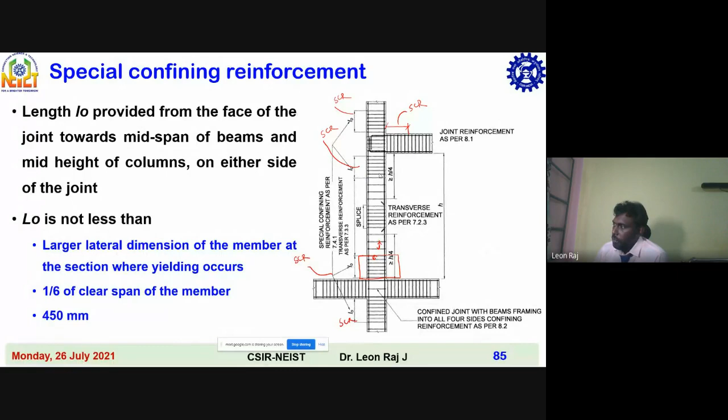Then, splicing should not be more than... so where the splicing is, there also you have to be careful, you cannot give it, as we have studied. So likely shear failure may occur here, here the shear failure may occur, here also shear failure may occur, and here flexural failure may occur.

Where are you providing splicing? On these regions you cannot provide splicing: at a quarter of minimum member dimension of the beam or column, 6 times the diameter of the smallest longitudinal reinforcement bar, or 100 mm. Near the splicing, when you are providing splicing, your links should be as close as possible.

When near the column face or beam face, spacing is also as close as possible. A confined joint with beams framing into 4 sides requires confining reinforcement as per 8.2. The area ASH of cross section of bar forming links or spiral must be at least...

For circular rings, ASH is the maximum of 0.09 SV DK FCK by Fy, AG divided by AK minus 1, or 0.024 SV DK FCK divided by Fy. FCK is the characteristic compressive strength of concrete cube.

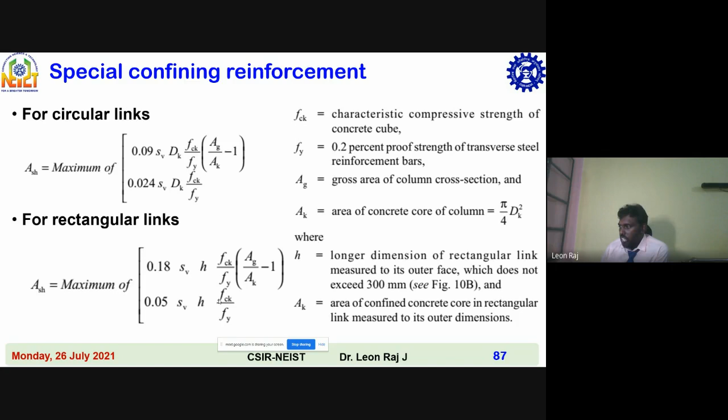For rectangular sections, H is the longer dimension of the rectangular link measured to its outer face, which does not exceed 300 mm. AK is the area of confined concrete core in the rectangular link measured at its outer dimensions.

Then special confinement near the footing. Near this face there is a chance of punching shear failure. It may fail like this, with cracks coming like this. That's why special confining reinforcement is provided.

Special confinement means closely spaced links. When the column terminates into a footing or mat, special confining reinforcement shall extend up to 300 mm into the footing or mat.

When the calculated point of contraflexure, meaning the change of moment under the effect of gravity and earthquake effects, is not within the middle half of the member's clear height, special confining reinforcement shall be provided over the full height of the column. It shall also be provided over the full height for columns with significant variation in stiffness along the height.

If you provide too much stirrups throughout the height of the column, its stiffness will definitely vary. If in one column you are not providing special confinement reinforcement throughout, and in another you are, the stiffness will drastically vary. This variation may result from abrupt changes in cross section size or unintended restraint.

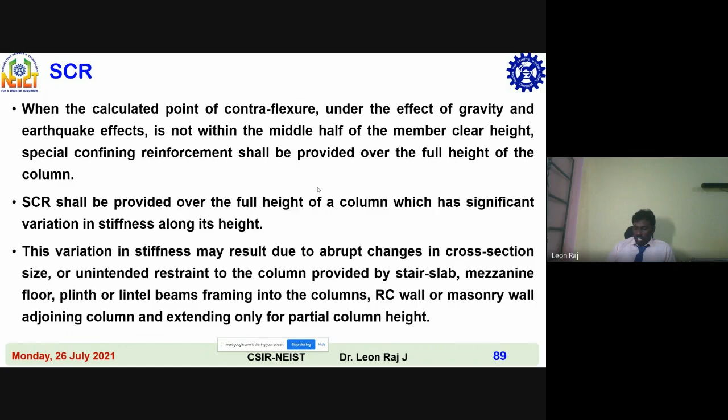Unintended restraint to the column may be provided by the stair slab, mezzanine floor, plinth or lintel beams framing into the columns, or RC or masonry walls adjoining the column and extending only for partial column height. So again, special confinement reinforcement applies to columns with variable stiffness.

For the development length of the longitudinal bar, here you are providing additional special confining reinforcement.

Column supporting reactions from... Any questions? Or we can answer the questions after the presentation also. Is it okay? Dheeraj Ahiwale.

Continuing: columns supporting reactions from discontinued stiff members such as walls shall be provided with special confining reinforcement over their full height. This reinforcement shall also be placed above the discontinuity for at least the development length of the largest longitudinal bar of the column, where the column is supported on a wall, and it shall also be provided below the discontinuity for the same development length.

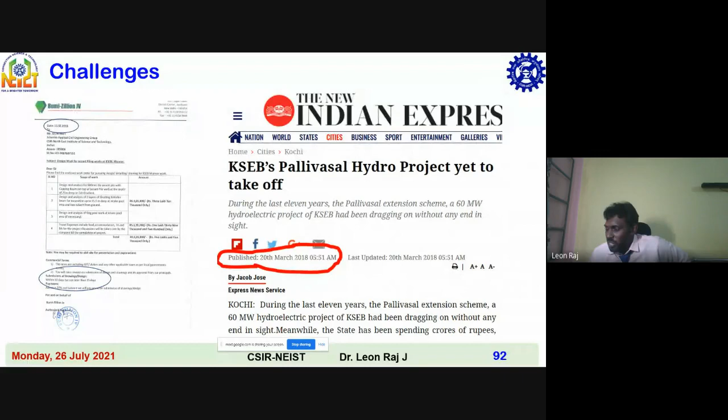So what were the comments they gave? The intake well had collapsed in 2018, the tunnel had collapsed in 2011, and they questioned the capability of KSEB regarding deep excavations.

So to go into the detailing part, I have to explain the concepts preliminarily - why we need the secant pile and how we detailed it. Before that, I need to give an explanation about this.

Deep excavations are common for tunnel, intake well, and box culvert constructions in urban areas nearby existing structures and water bodies. Secant pile walls are constructed by a line of overlapping piles arranged sequentially, plain and reinforced concrete pile.

So this is the primary pile, that is our plain concrete piles. This is the secondary pile, also known as reinforced concrete piles.

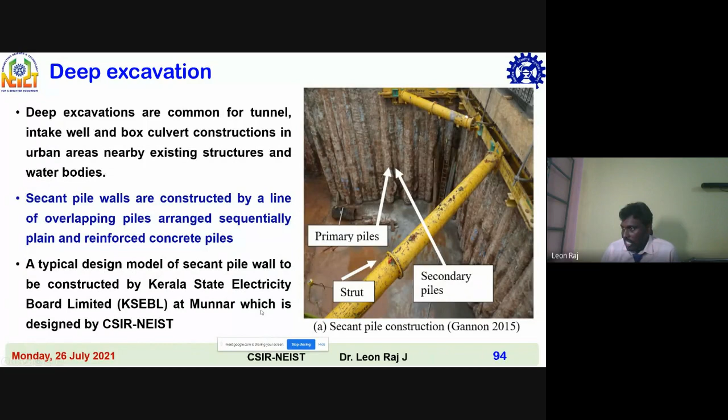A typical design model of the secant pile wall to be constructed is designed by CSIR NEIST, and this is a secant pile wall. Secant pile is a temporary retaining structure in which primary piles are installed first and the secondary piles are constructed in between the primary piles, so this is the primary pile and the secondary piles were constructed in between them, giving a secant shape.

Due to arch action it retains the soil. Installed first, secondary piles are constructed in between the primary piles. Plain concrete primary piles are intersected by reinforced concrete secondary piles.

Design and analysis of 800 mm diameter secant pile with capping beam of 21 meter deep excavation. Design and analysis of 3 layers of strutting and waler beam for excavation up to 15.5 meter deep at the intake pool area and box culvert region from ground.

So this is the river, and the depth of the river is 7 meters, and excavation is done up to 21 meters. The loads considered were dead load, earth pressure, earthquake load, water pressure.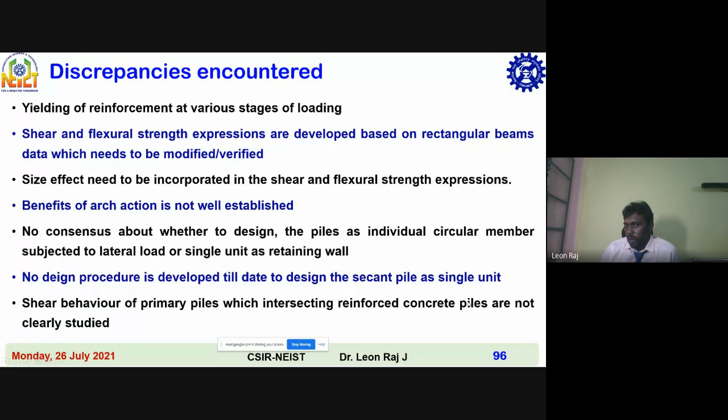And on the backside of this hilly region, there is a tunnel of length more than 10 meters, I think. My objective is to give the solution for this.

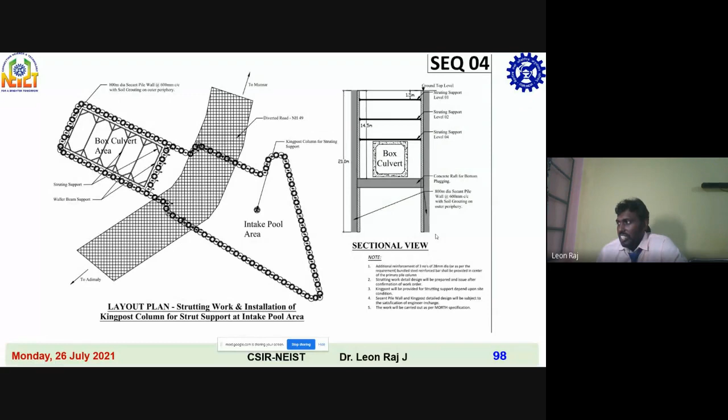Then they changed to 7 meters. Even then, whatever we designed, we just followed that. This is a box culvert region, secant pile wall.

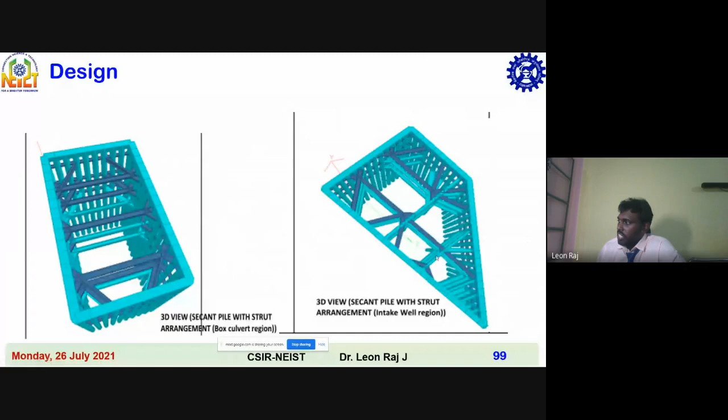It's analyzed in STAAD.Pro. This is the intake pool region, and this way water enters. This is the maximum deflection of a pile - maximum bending moment and maximum shear force can be calculated along there.

Pile and design of piles, grade of concrete M35, grade of steel Fe500. Then loading data was given - maximum bending moment at the top, and maximum shear force. For that, the reinforcement and diameter of the bars were arrived at.

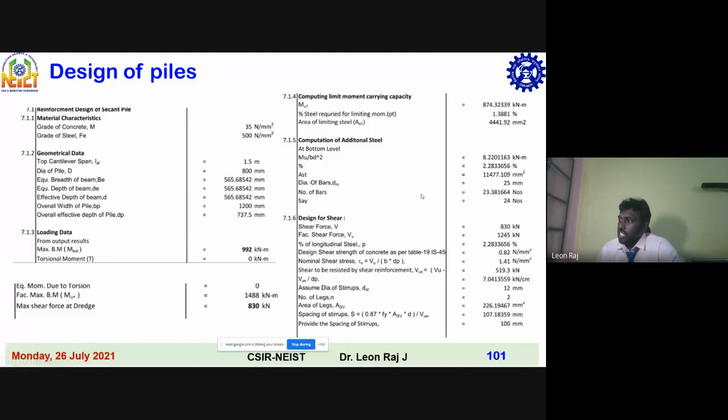Next, coming to the picture, design of pile cap beam. In other cases you always design the beam for the vertical direction, but in this case you have to design the beam for the horizontal direction.

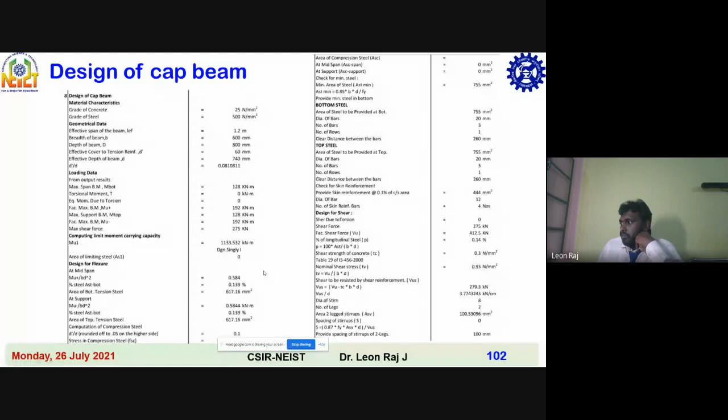So this is a pile - the diameter of the beam, the grade of the concrete, grade of the steel, then the breadth and depth of the beams are given, assumed, and for the given ultimate load moments, the cross sections were designed. Then the reinforcements were detailed.

So this is the concrete cover that was provided. Ductile detailing was planned according to IS 13920. Close spacings were provided, and splicings were not provided in the critical sections, not provided near

the strut zones. Here you can see 16 mm diameter bars provided at 125 mm spacing, and the inner ring, that is the supporting ring, was 16 mm diameter bar provided at a spacing of 1.5 meters. Then longitudinal reinforcement is provided as 13 bars of 32 mm diameter bar plus 13 bars of 32 mm diameter bars. Two bars were provided.

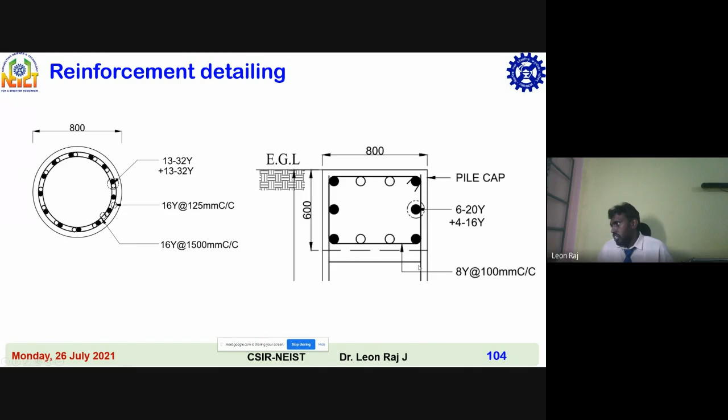This is the pile cap, and this is the reinforcement detailing. Additional special care was provided at the strutting places. This is the concrete cover.

So this is how the layout of the secant pile wall looks, and this is a strut. Struts were provided at 3 layers - at 1.5 meter level, 4.5 meter level, and 7.5 meter level. Then waller beams were provided to distribute the load.

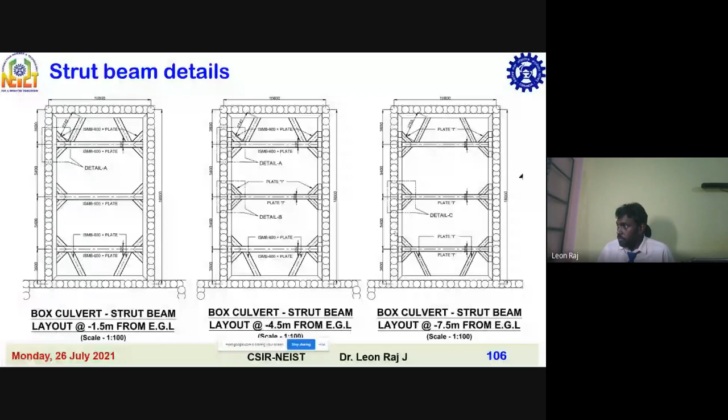So this is the typical figure after excavation of soils. This is the secant piles, and this is the waller beam. This is a strut beam.

Additional struts were provided near the side faces, and to ensure there is no stress concentration at corners, additional piles were drilled. This is how the plates were anchored into the piles. And this is the details of the king post.

The span is too much, right? For this box culvert, a king post is not required. In the case of secant pile wall, it's the intake pool - additional king post columns are needed to reduce

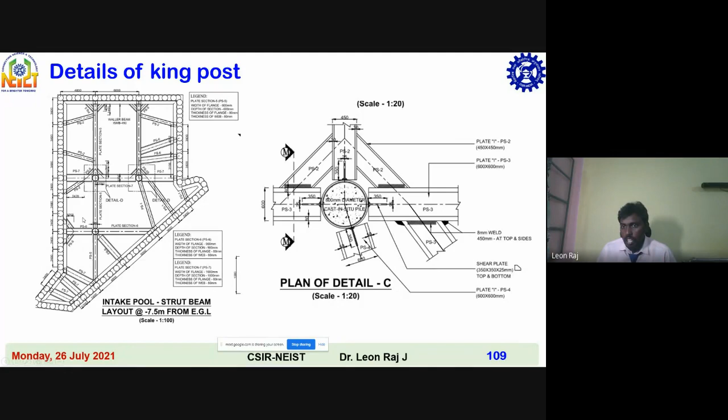the span. So sequence of... actually this is a little bit deviated from the topic of ductile detailing, but still when I'm giving a case study, I have to give this information also. That's why I'm giving a few slides about this construction sequence.

First, drilling, reinforcement caging, concrete pouring, pile capping, then box culvert region, intake pool region, demolition of secant pile at the intake pool region. So this is how drilling work is done. Then you have to put the caging.

What is the density of concrete? 2,400 kilogram per meter cube. What is the density of bentonite powder? Bentonite powder is nearly less than 1,000 kg per meter cube.

So we have to pour the bentonite slurry into the pile wall, so that there is no collapse. It ensures there is no collapse. Then we will place the tremie pipe into this

piles. Then we will pour the concrete, so that once - when you pour water inside the oil, water will settle at the bottom and automatically oil will come out, right?

So that is the concept here. First you pour the bentonite slurry, over which we will pour the concrete, so automatically the bentonite slurry will come out. And what is the beauty of this bentonite slurry? Again and again we can reuse it.

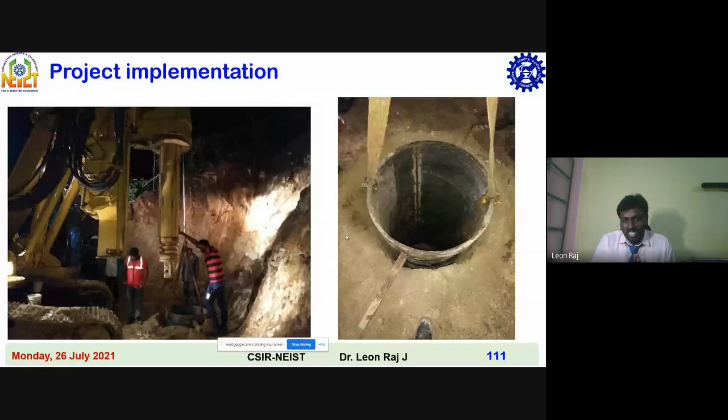For our whole construction process we used only one mixture of bentonite slurry. This may be a company secret, you should not tell to others, but still as a clue I am giving it to others also - this bentonite slurry can be used again and again.

So where was the first mistake? KSEB - where they did the first mistake was in the drilling, they made a mistake that they went like first, third, fifth drilling like that.

If you miss this drilling, definitely it is going to collapse, no doubt. So this is the trick behind this secant pile drilling.

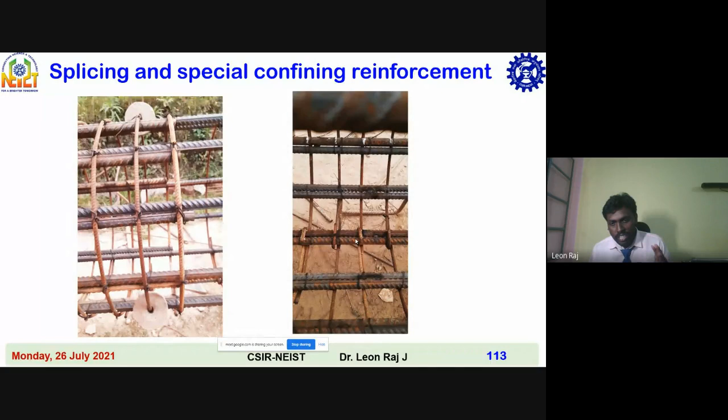Then spacing of stirrups, and here you can see the welding, and the hooks were nicely at 135 degrees. I again and again ensured - I went there and stayed for nearly 25 days, and I ensured that they are doing that ductile detailing.

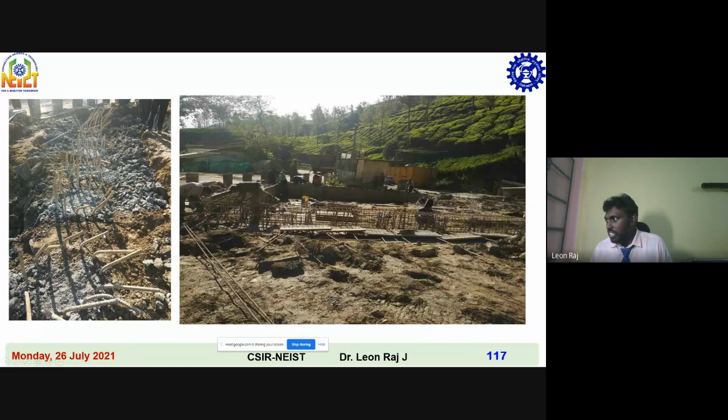So this is how this staggered lapping were done. Then the reinforcement cagings were pulled up and this entered down. Then tremie pipes were inserted. Concrete was poured - this is the bentonite slurry poured. Then concreting was done. Then this is a pile cap for which this pile cap was done.

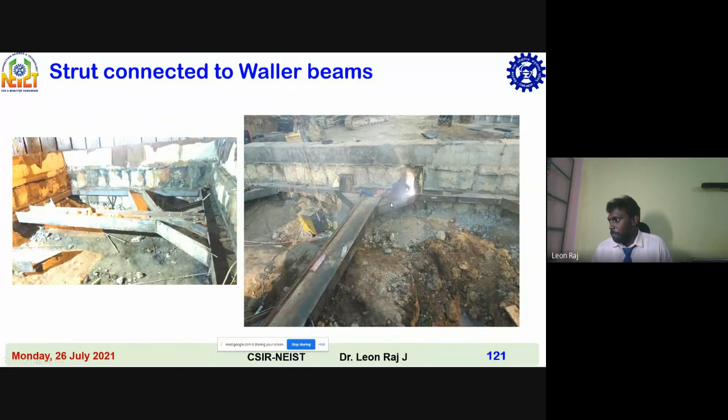Then we started the excavation. Once up to 6, 7, some 3, 1.5 meter itself, we started. Once it is done, we have done the marking, and in that marking, waller beams were placed. This is called waller beam, and once waller beams are placed, we have done this - beams were fabricated, and finally excavation was done.

Even now also, if you go, you can see this - what is that - this hydroelectric power unit. So any questions?

Oh, thank you. Many of you have given the comments. Sedu Madhav says excellent sir, thank you. Mr. Ravindra says very nice informative session, thank you, and very nice presentation. Thank you, very informative case study.

Thank you very much. All of you go and see one time, it is still running. Not yet completed, but still for educational purpose they will allow. I'm not sure whether they are allowing or not, but definitely for educational purpose they will allow. Whenever you go to Munnar, visit this. It's a very challenging work that KSEB has taken up, and we have also helped the Kerala State Electricity Board people. They are also very helpful. Really, they have done a nice work.